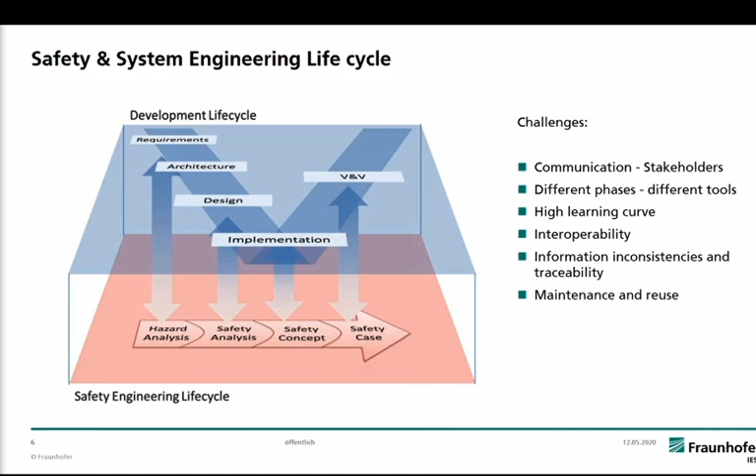able to, right? And another important point is about information inconsistencies and traceability, meaning that even if you are able to move information from one tool to another, you still have the problem that once you want to maintain that information, whenever you update it in one tool, you basically have to do the same in the other tools, and this requires a certain process to make sure that the information is not lost and that the updates are done correctly, and so on. So this makes things a little bit hard in our current daily life, right?

And this is basically what we see happening in traditional safety engineering. Typically you will see that for the HARA we will use Excel, for example; for the safety concept, the safety case, or for item definitions, you will basically use Word, because this typically includes a lot of explanations, maybe figures and so on. For requirements engineering you have more specialized tools. And whenever you go for validation, verification, simulation, and design, you will have even more specific tools to work with, right?

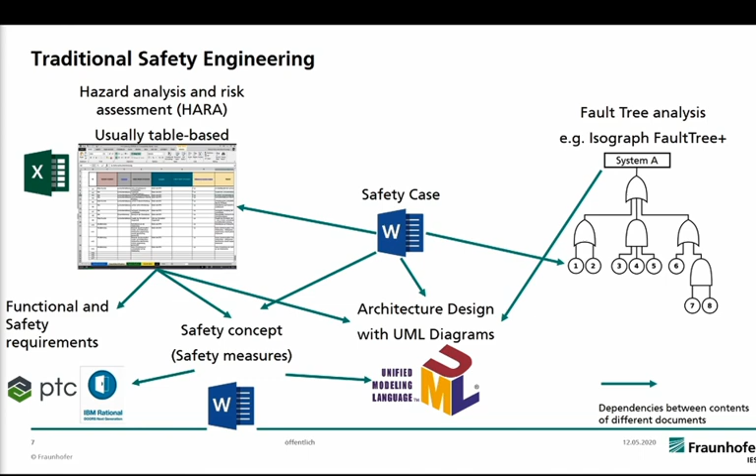So the point is, what can we do about it? Well, our answer to that is to move towards integrated model-based safety engineering. This means that we want to formalize to a certain extent those documents that we usually make use of in these other tools. The idea is to integrate those in a domain ontology. This is the picture that you see on top right. These are all the concepts that bring many of these artifacts together, they are integrated, and then they will be able to be displayed through views. So this is basically what we want to achieve here.

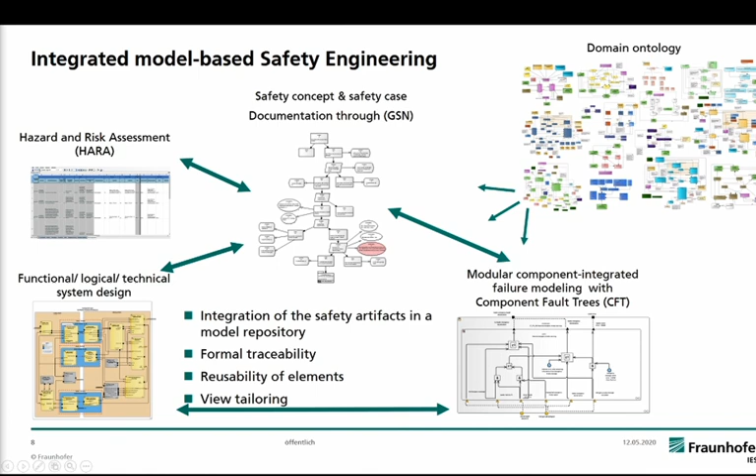We want to make sure that all these artifacts and all this information documented in those different tools relate to the same model, and this model contains these artifacts connected to each other, so that we have a gain from that. The most important thing about it is the traceability aspect. Once you have those artifacts connected and you're able to trace them, you can gain a lot from it with respect to analysis, traceability, and checks like consistency or completeness, general validation checks with respect to your models. So this is one of the important aspects you should aim at when having such an integrated model. So how can we support that?

Well, we want to present to you today safeTbox, a tool that implements such an approach. What is safeTbox? safeTbox is an Enterprise Architect add-in. This means that you can extend and specialize the UML by doing profiling, which basically allows you to define your domain-specific model. Moreover, it gives you the possibility to extend the functionality by executing your own C# code. safeTbox is a little bit more than that, but this is the core extension possibilities provided by Enterprise Architect.

And what else is safeTbox? We not only wanted to have an integrated solution, but we're also looking at other aspects of a model-based solution that are very important, which are the usability concepts. We not only want to be able to model, but we want to be efficient doing that modeling, and get fast over our activities, because we want to focus on the things that we do and not waste time modeling some dumb aspects. So basically, safeTbox provides its own set of context menus, controls, shortcuts and so on, and we will see that in action relatively soon. All right.

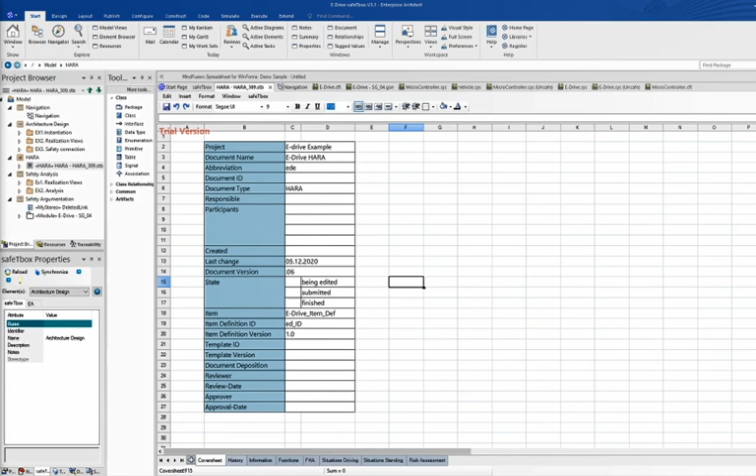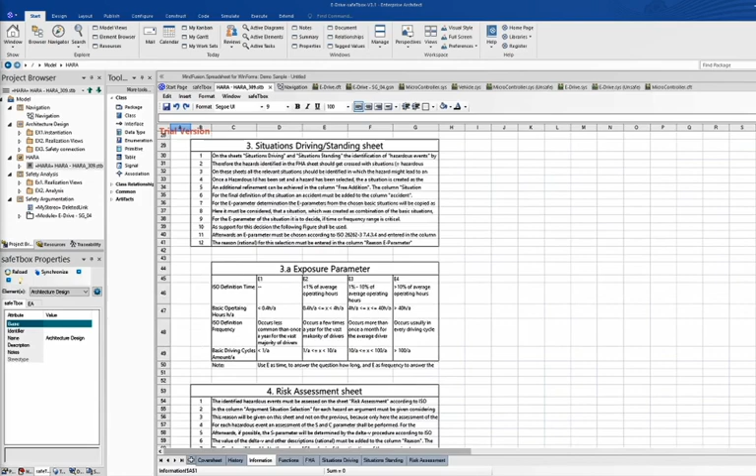All right, so I switch now to my model, and here we have already opened our HARA. You see on the bottom several tabs, and these describe the steps that are meaningful to be performed within the HARA, which allow you to create such an important document. So we have something very basic like your cover sheet, your history, a couple of guidelines on how to perform this HARA. This is flexible, and the user will be able to exchange those descriptions and tailor them to how the company works.

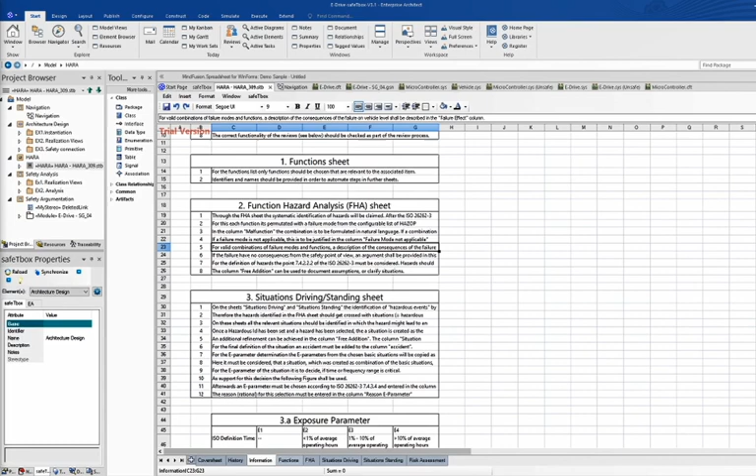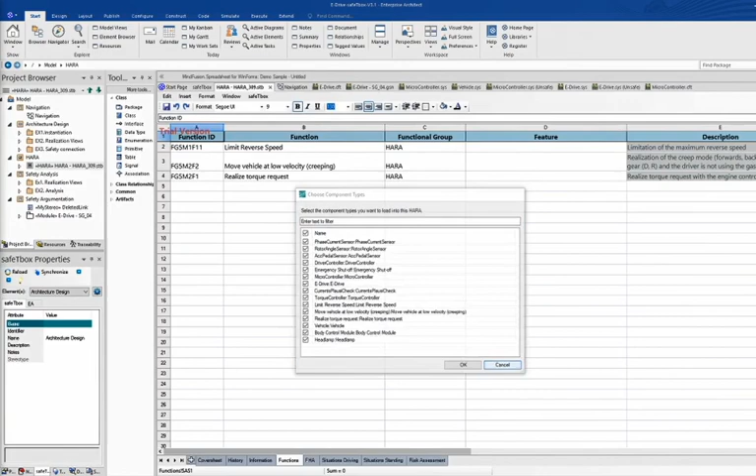But in the end, the rest of the tabs of this HARA sheet are more or less fixed from the functionality point of view. All right, so what can we see here? Our HARA works in the following manner. In this first tab, called functions, you will be able to load existing components or existing functions. Then you will see here a list of components, let's say functions, depending on what abstraction level you use for your HARA, and they will be listed here.

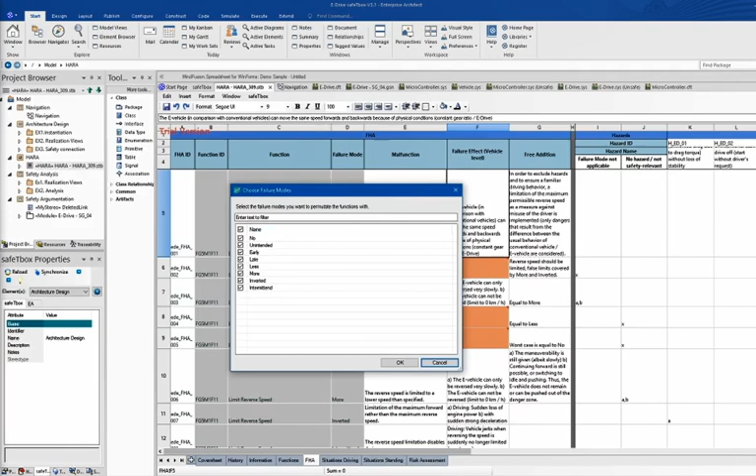Basically, this can be done by permutating. As I pointed out, you can define whether you would like to permutate something or not. On the other hand, you will be able to create that catalog of hazard words. So if you want to add new words or permanently remove the ones listed, you can tailor it to your needs. Once you do this permutation, it occurs automatically. These parts still need to be filled by you with meaningful explanations. This is where the analysis comes from.

And finally, you will be able on the right side to define the hazards. The hazards, as listed here, need to be crossed against one or the other malfunction. So you have the possibility to define whether one of these malfunctions is not really applicable, it cannot be described, or it was described through another failure mode already, whether it is safety relevant or not, and if it's safety relevant, then it will have a cross with the hazard that you may have defined.

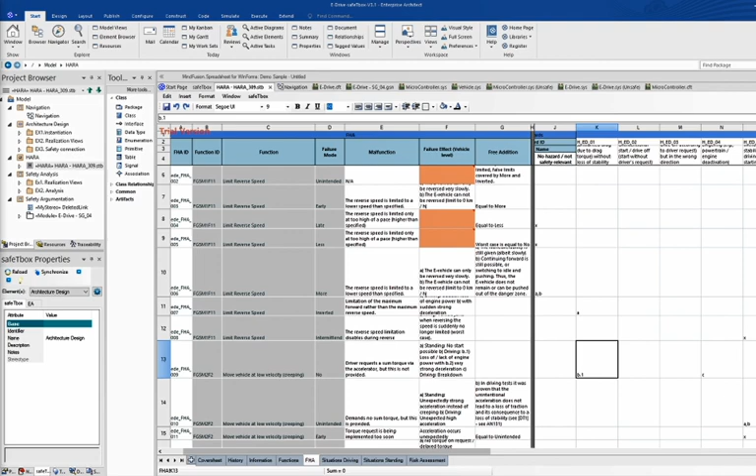This creates, as you see, a traceability already between hazards and functions, right? Good. Once you have done this, then you will be able to perform or create and define the hazardous events. What are the hazardous events?

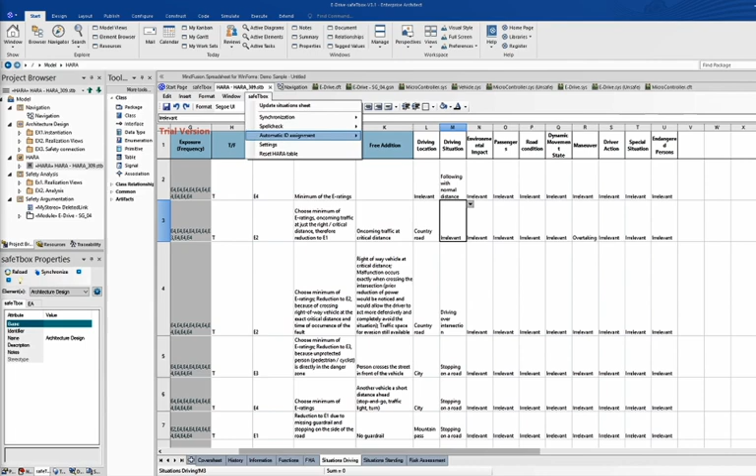Well, basically what you want to do is take a look at your catalog of driving situations and standing situations, which is what you see here on top. And then basically you can select one of those different scenarios by taking some of them from the different categories. Of course, as I pointed out, you can again configure such a catalog. You can define the categories, you can define the items in this category, and then you can determine what is the exposure parameter of these situations, right? Good.

And by combining those situations, then basically you fill automatically the situation description. Of course, sometimes you may also want to provide some extra descriptions, and then you can do it in this field here. And in the end, you might also describe the accident that may happen from this concrete situation, and therefore, in the end, provide a refinement of your parameter, whether it will stick to the ones automatically associated with the situations, or maybe another. Maybe you want to lower it because you have an argument for that.

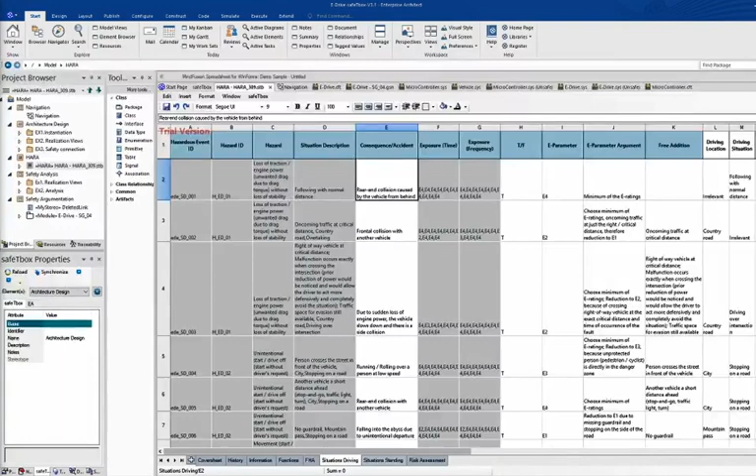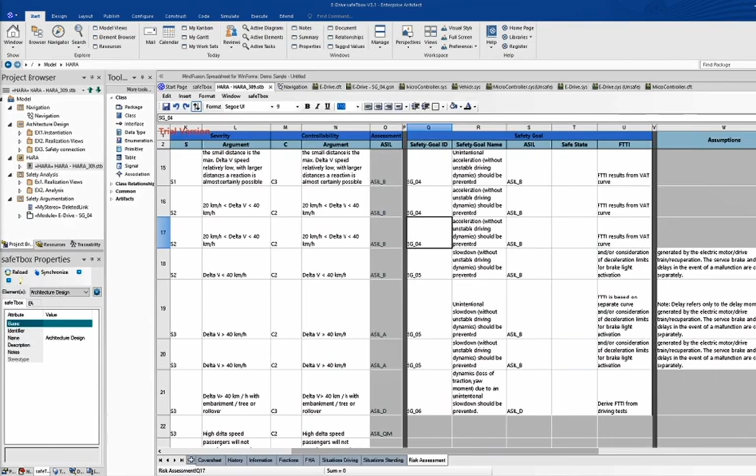So standing situations work similarly, and finally for the risk assessment, basically you have a lot of information which is already loaded from the hazardous events, and what you basically have to do here is to fill the part of the severity and the controllability. And if you want, you can provide, of course, an argument for where this value is coming from, and finally, of course, decide what safety goals need to be associated with this assessment of the hazardous events.

Finally, of course, you can also link here assumptions to your safety goals, or let's say to your entry of the risk assessment table, and complete the risk assessment in total.

So one of the important things about this approach, as we have presented here, is that we have, first of all, a tabularized approach. This might be confusing for some people, because some people think, okay, if it's model-based, it needs to be somehow in a diagram, but this is not necessarily true. So what we have here is simply a tabularized approach, in which some of these elements are actually modeling elements.

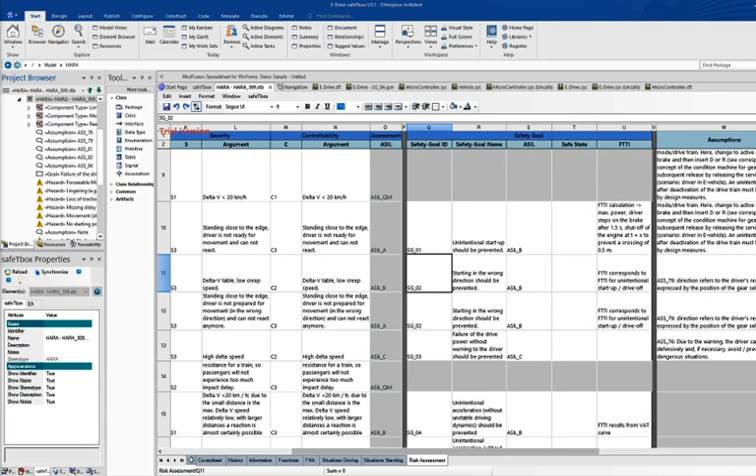So whenever we look back in the details of our project browser in Enterprise Architect, we will be able to see that we have here the functions that we used at the beginning, several assumptions, then safety goals, and then hazards. So these are basically the modeling elements that we consider most important to be consumed outside of this table.

And of course, the advantage of having this HARA in a tabularized way and not in a diagram is the compact way it is displayed here. So basically, we don't need to waste huge diagrams trying to depict this, because all this information is simply very compacted here, and then we just focus on only the artifacts that are really relevant for the rest of our safety life cycle.

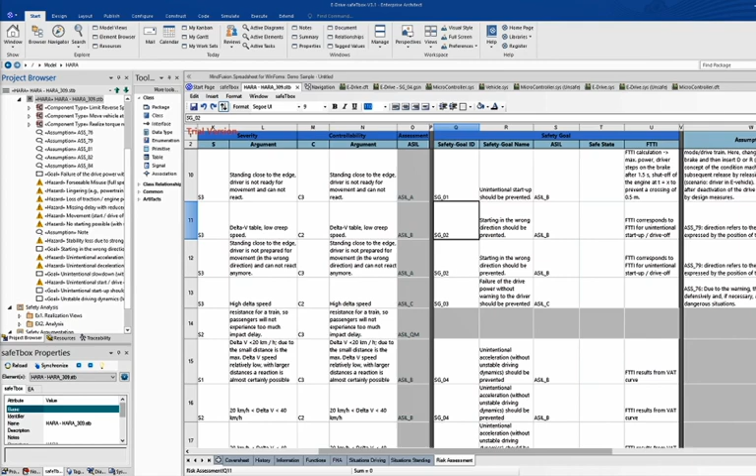And so we will see later how, for example, those safety goals are related to our safety concept, or how hazards can be linked to the fault tree analysis, for instance, right? So yeah, I think this gives you an overview of the HARA, and I would like to then move forward with the rest of the presentation.

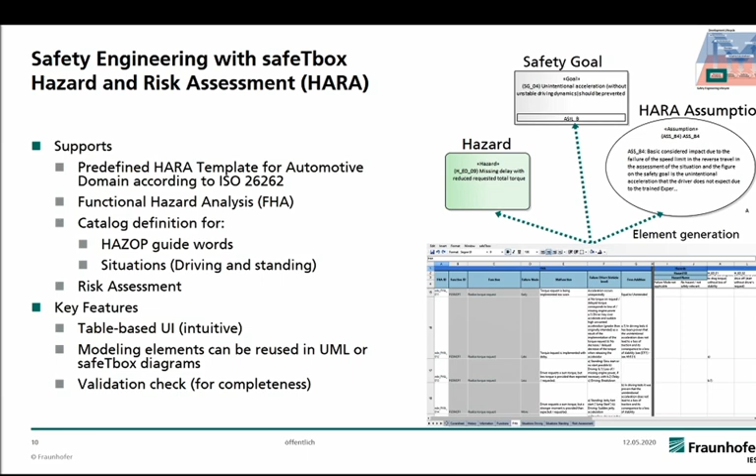Good. So coming back to our slides, basically, we can move forward with our architecture design part. And what we mean here with architecture is, there are many things that you can do in architecture, but we want to focus especially on the use of functional networks.

So well, this is not really part of the safety life cycle, but functional networks are probably one of the most important artifacts used by engineers to communicate a design, right? And currently UML and SysML provide support for it. So basically, why do we have an extra implementation in safeTbox? That is the question here, right?

So well, first you have a simplified and generic approach here that allows you to depict your desired level of detail. Whether you build a more functional, logical, or technical architecture is your decision, let's say in the way you name things, and in this sense, it's also kind of similar to SysML.

But of course, with the difference that you don't have so much modeling complexity as provided by SysML, which provides many ways of depicting a port, for example, right? Second, it focuses on the interaction with the safety engineers. We'll see that it will be possible to define, for instance, ASIL levels for components or ports, which might represent CAN signals if you want to go for more technical views, or might simply represent a data flow just for data exchange. So it's really up to you how you handle that abstraction level, right?

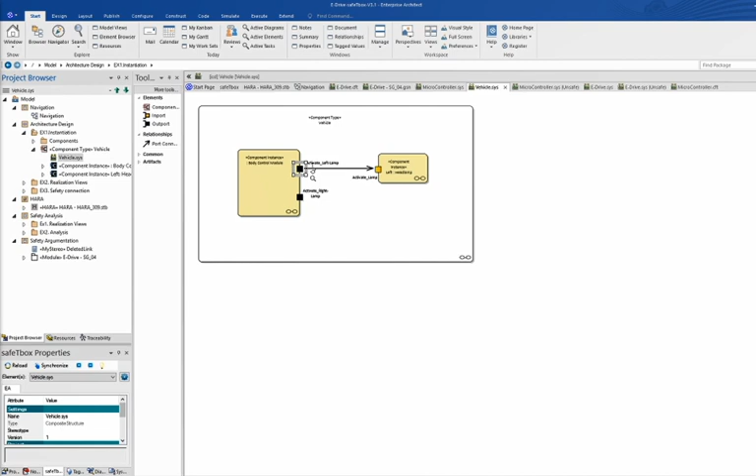All right, so let's take a look at that in the tool. I have prepared for you a couple of very simple examples to follow. In this first example, I want to show you our instantiation concept, right? In this case, we see here a vehicle. We see the body control module in a vehicle controlling the activation of the lamps, for example, the headlamps, right? So how do you model multiple headlamps?

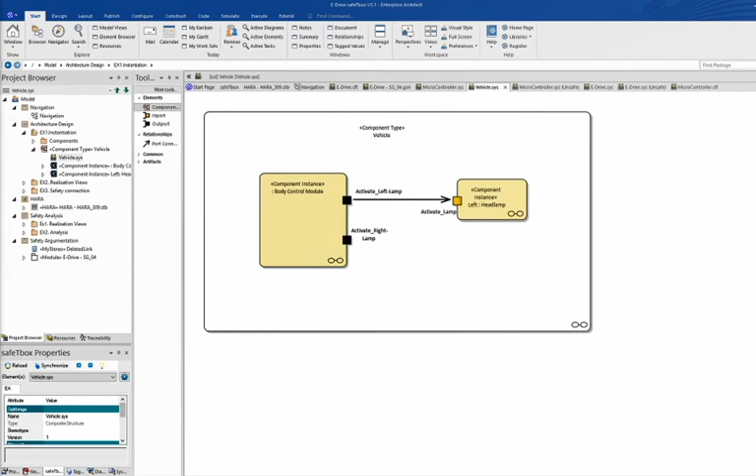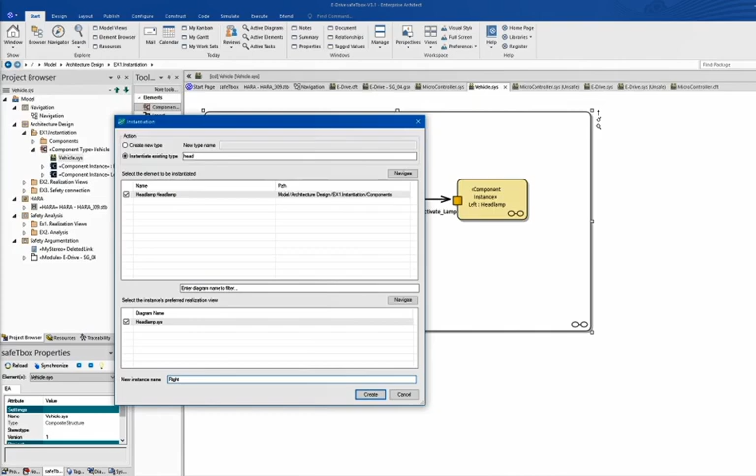Well, we basically support the user in that we have this instantiation mechanism that allows you to find your components easily. For example, you have your headlamp, and you want to say, okay, I want a headlamp. I already have my left headlamp. I would like to add the right one, and this will then automatically bring my right headlamp into my diagram, and finally I will be able to connect those signals.

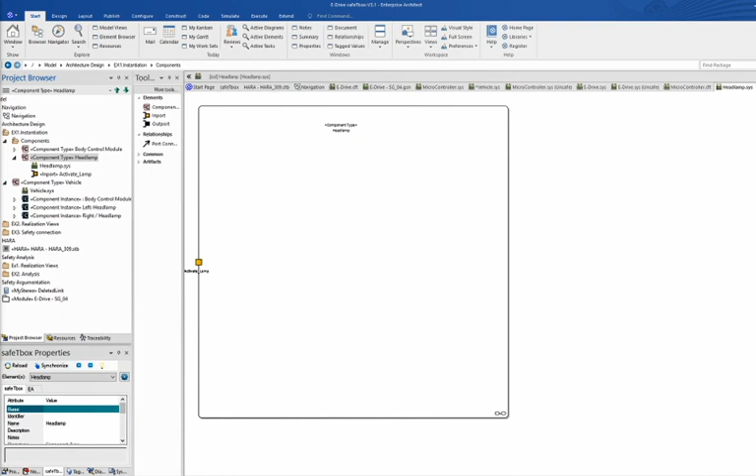So you see right now we have reused a component. Whenever we look behind this and we find the realization of this headlamp component, we'll see that it basically exists only once. As you see here in the project browser, we have only one headlamp, which has been instantiated two times here, on the left and on the right. And this simplifies the way of reusing components in safeTbox compared to what you can do in UML or SysML, where you have to go a little bit more manual during the modeling phase. We simplified this process so that it gets faster.

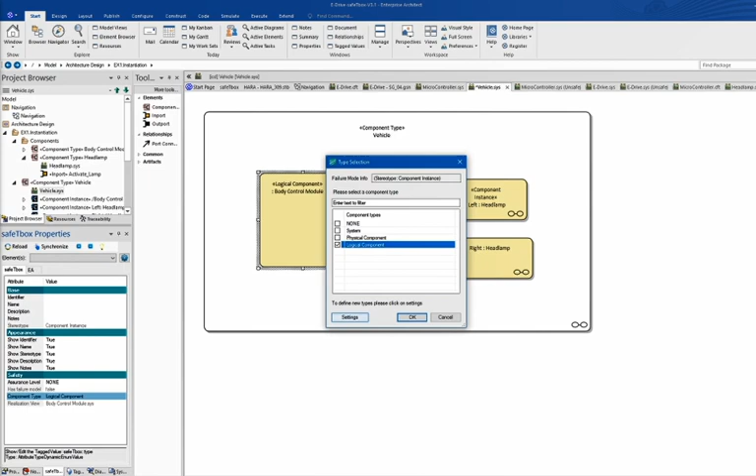As I pointed out, what you could also do here is define the type of your components. You might want to say, okay, this is not a component instance, which is the generic option, but this is actually a logical component, right? You might define, of course, your own types of components. You will be able to do so through the settings. So you can define new types for components, as well as for flow types.

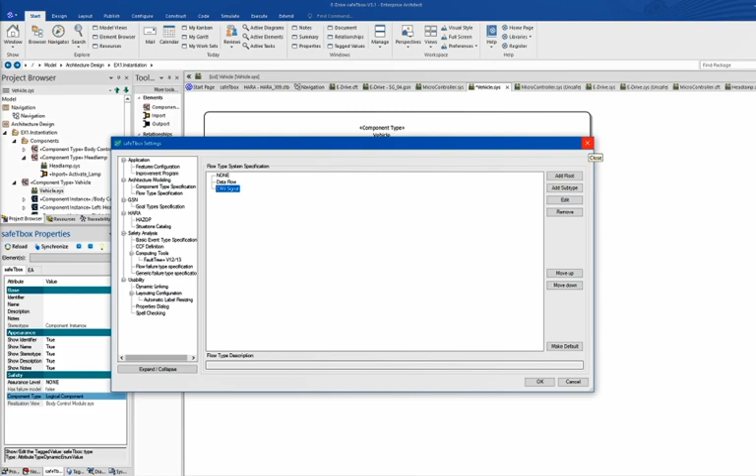Meaning you may decide, for example, for CAN flow, to go a little bit more technical for a CAN signal or whatever, and this you will be using basically for your ports. For instance here, this flow type is none, but you will be able to say, okay, this is a CAN signal, and this is now already set for your port, and this will have a couple of advantages. We will see that later when we integrate this with the component fault trees. And as I pointed out, this will allow you to formalize your models a little bit better.

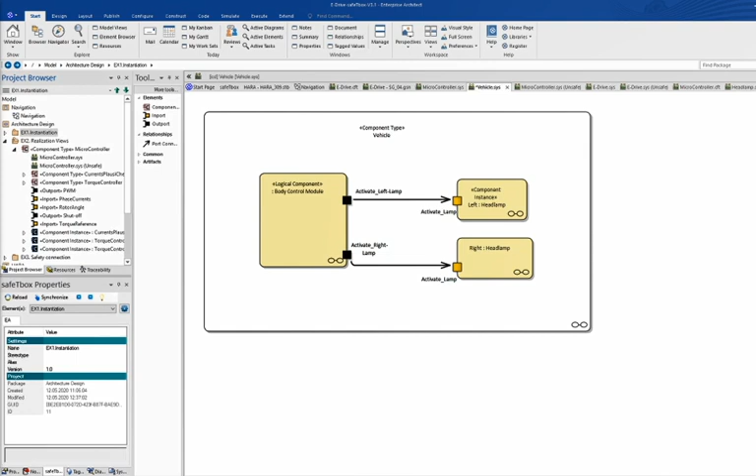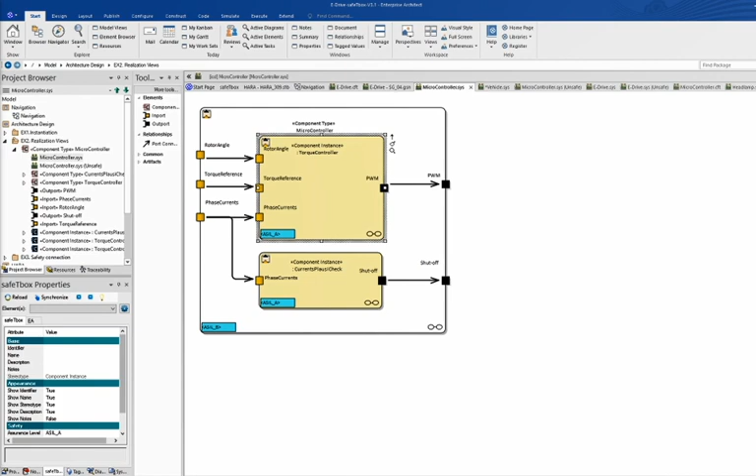So I would like now to explain our second example with respect to realization views, and what is a realization view. So basically we see that here a component is always typically divided into a specification view and a realization view. The specification view hides all the details of the implementation of a component. In this case, this component instance will represent the specification view of the microcontroller component, right? While in the microcontroller, we are seeing the realization view of that component. So we're seeing how this microcontroller is being refined internally and what components make part of it, right?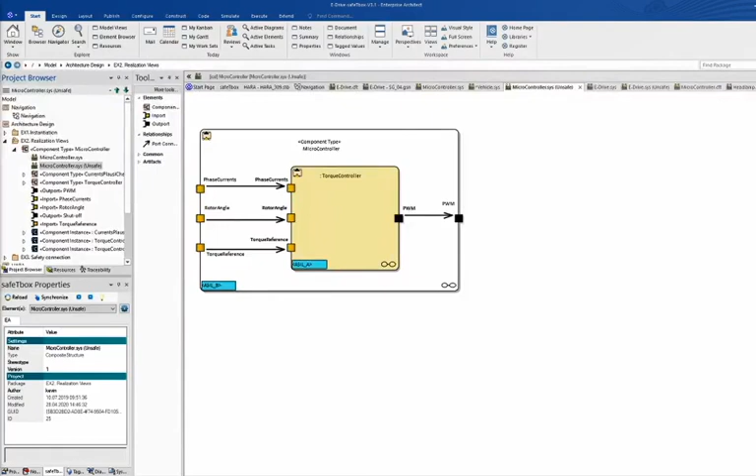And what can you do with that? As pointed out in the slides, you can manage, for example, variants of this microcontroller. You see in our project browser, we only have one microcontroller and we have two diagrams associated to it. One we have called unsafe, which has a simplified version of the microcontroller's realization, while the other one has an extra plausibility check. And this is what we want to achieve. We don't want to create another microcontroller. We just want to say, it will be the same microcontroller, but I will have it in two different variants, two different implementations, right?

Because we have two different versions of my vehicle or of my functions, and therefore the main interfaces of the microcontroller might not change, but internally it might change the functionality that realizes that controller, and this is what the realization views might be useful for. And what can you do with those realization views? Well, we support you and automate many things for you with respect to the creation, the cloning, setting those realization views for those components and so on. This facilitates a lot the navigation and keeping them all up to date, right?

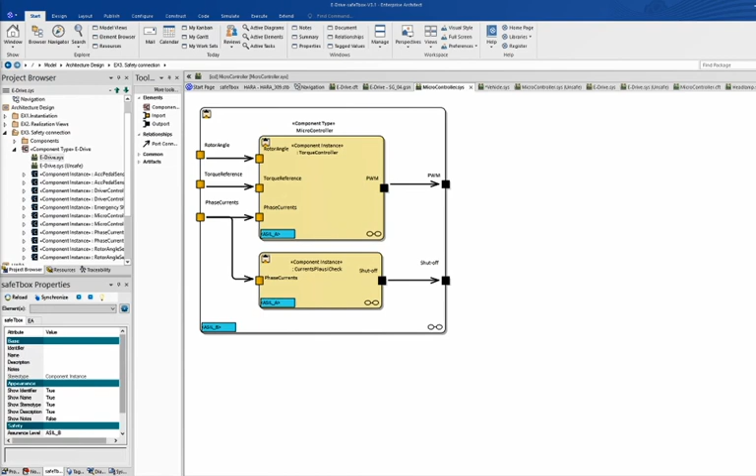So here you will see, for example, at the top level of the eDrive system, where this microcontroller has been instantiated again, a similar story. Here we see the unsafe version with the microcontroller. Of course, behind this microcontroller is a simplified version, right? And on the other hand, a more robust eDrive system, already including an emergency shut off and a safer microcontroller, right? And again, here you will navigate to your specific version of the matching realization of the microcontroller. So I just wanted you to know that this can be applied over all the hierarchy, and this will allow you to depict those variants along the whole hierarchy, right?

What I wanted also to say about this example was the focus that we place on interaction with the safety engineers. As you see here, when the actual functional network would not, in theory, have something specific about safety, we have considered, for example, adding the ASIL levels to the components or the ASIL level to the ports of the signals. As you can see here, I may want to decide what ASIL level that signal is, which might be relevant to facilitate that communication and interaction between the engineers, right?

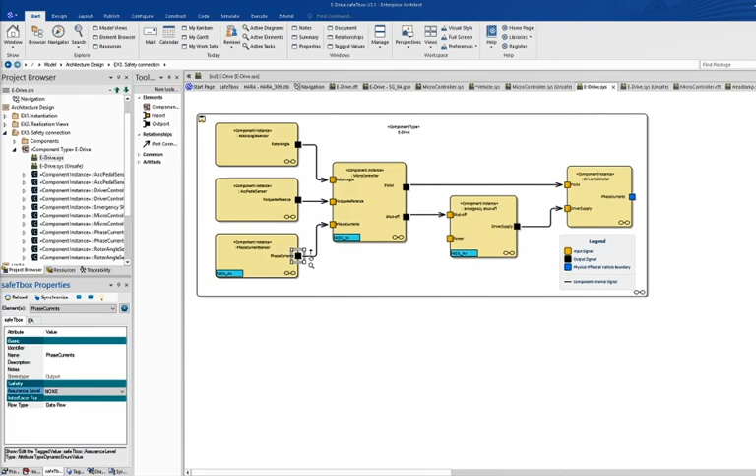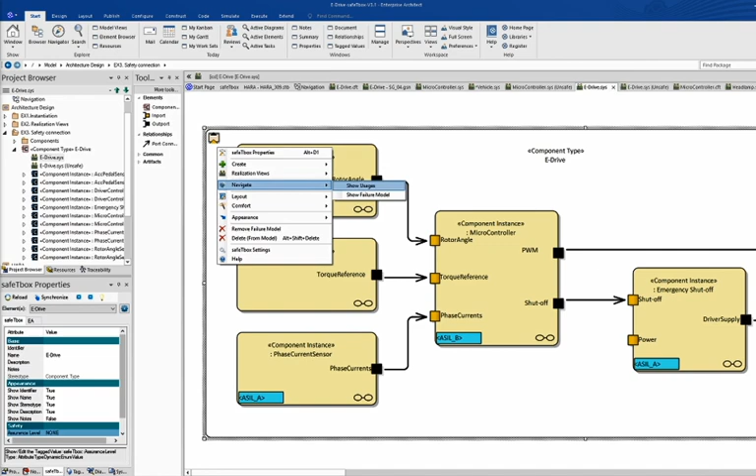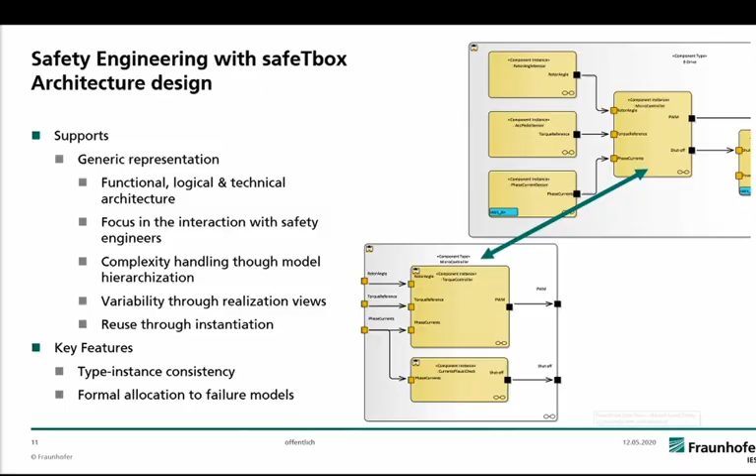And another aspect that is important about this diagram, I hope you will notice, I will zoom up, is this icon here. This icon on top means that this component is associated with a failure model. I would like to bring you there now. And this failure model is basically a component fault tree, right? And this is what I would like to talk about now. So I'll be back now into my slides. And basically this is what we have with what we just saw.

Basically, you can create the hierarchy, you can link ports with ports, and this can be understood as the propagation of failures within a fault tree of one component to the fault tree of another component, and in this way create the failure logic structure for the whole system, also following the same modularization concept as provided by the architecture, right? So this is what you can achieve here, from the modeling perspective. Again, we will have the same chances for reuse and variability handling as showed before.

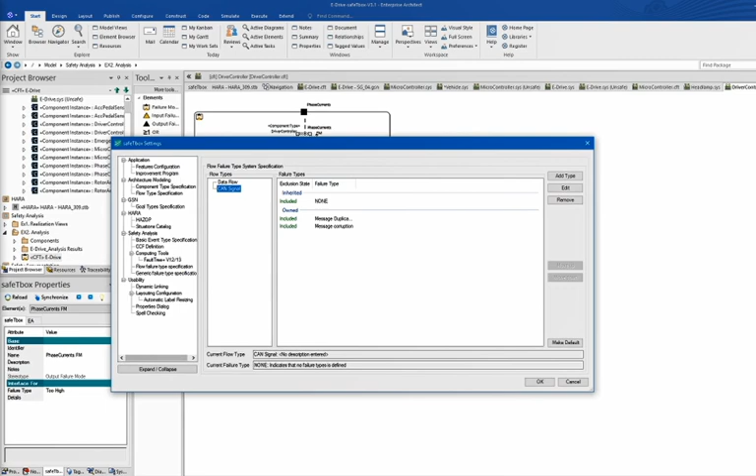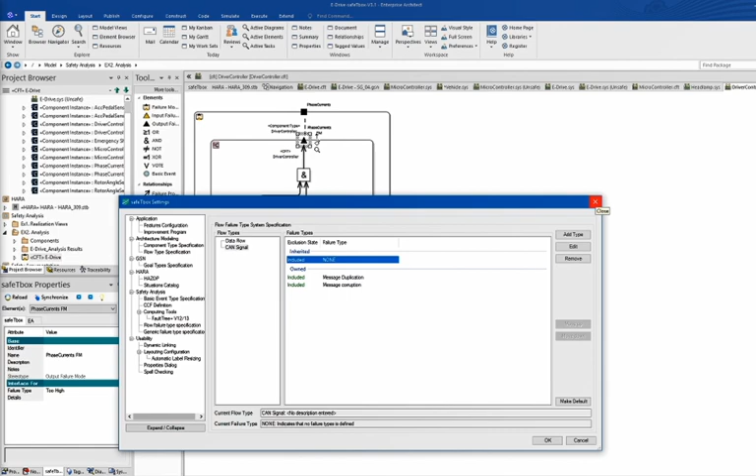Another aspect is that you can define specific failure mode types for your signals. For example, this failure mode is associated to a port, and this port has a special flow type. You can then define for those flow types the kind of failure modes they can have, which means you are formalizing your model. This helps you, depending on how structured you are, move faster with your analysis and in a more systematic way.

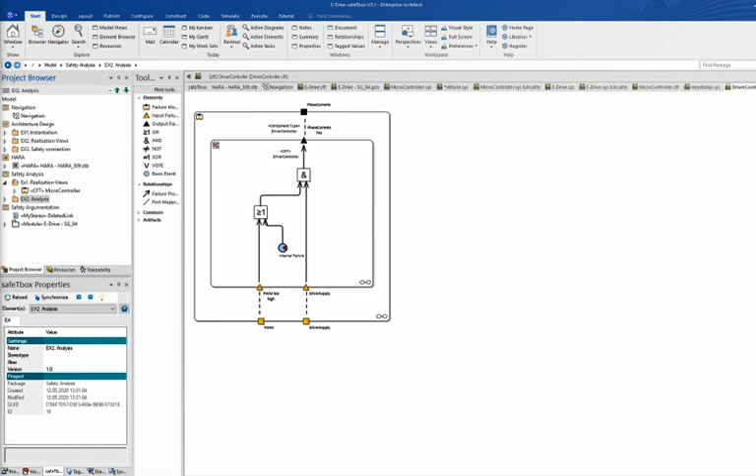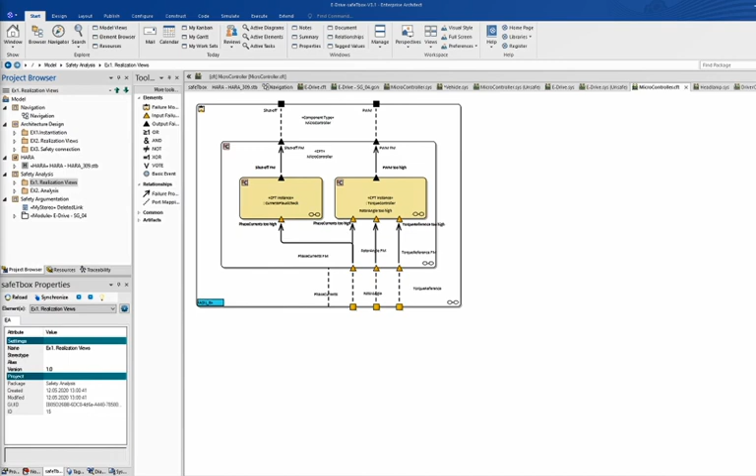So this is with respect to the modeling aspects. Going back to our slides, I want to finish this part saying that we also support to a certain extent SysML, in the sense that we are able to integrate fault trees and SysML blocks in a similar way as we do for components. Those mappings can be established, the traces can be followed, and so on. It doesn't have that power of the type mechanisms, because this is very safeTbox specific and would be hard to support with SysML, but since the tool is extensible, you can implement it yourself, or we can implement it for you if desired.

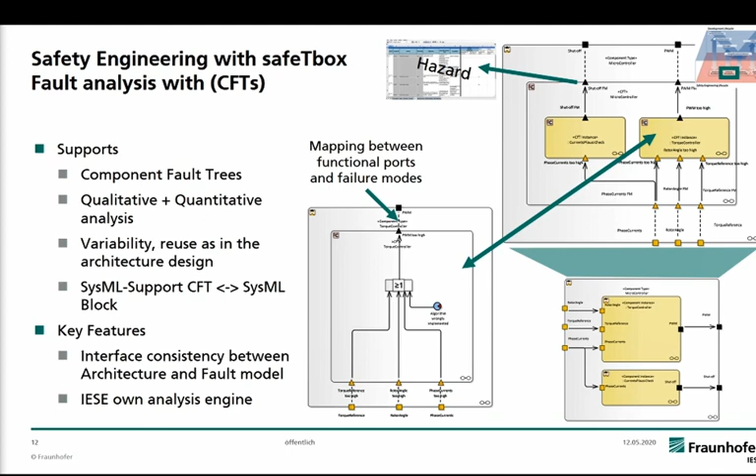As I pointed out, we have a strong focus on safety analysis, specifically fault tree analysis. Our tool not only supports the modeling aspects but also the qualitative and quantitative analysis. On the qualitative side, we support minimal cut set analysis, and on the quantitative side we support top event probability, event importance, and common cause failure analysis.

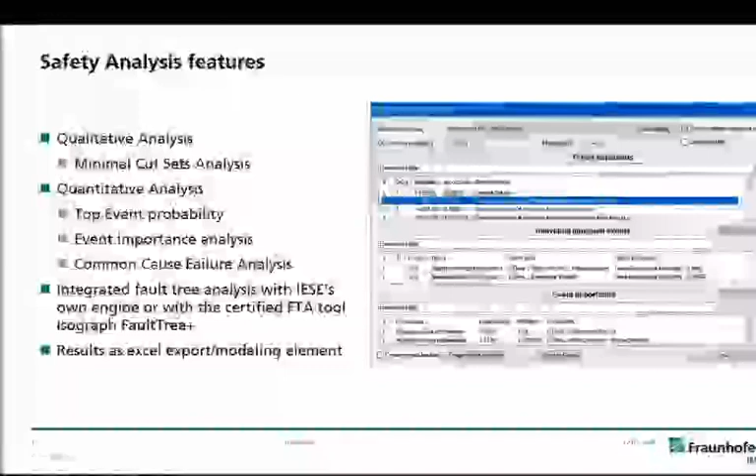You will be able to decide whether you would like the tool to perform the analysis on the IESE computation backend, or do this with Isograph Fault Tree Plus. There is a possibility to connect the tools. So how does this actually work? When we look back, for example, at one of the fault trees, a basic event can be parameterized here.

For example, you can choose between a fixed probability, rate, dormant, time at risk, or uniform. We have not yet supported in our computation backend all the distributions that Fault Tree Plus supports, but we have chosen the most common ones. You will be able to parameterize basic events and parameterize input failure modes.

Why is this the case? Basically, what you can do is assume to a certain extent what the failure probability coming from another component will be. If you depend on the input of other components, you might assume during your development what this information will be if you don't receive the fault tree and cannot integrate it into your own. Then at least you might receive this information and model it internally, and therefore perform the analysis modularly at any level.

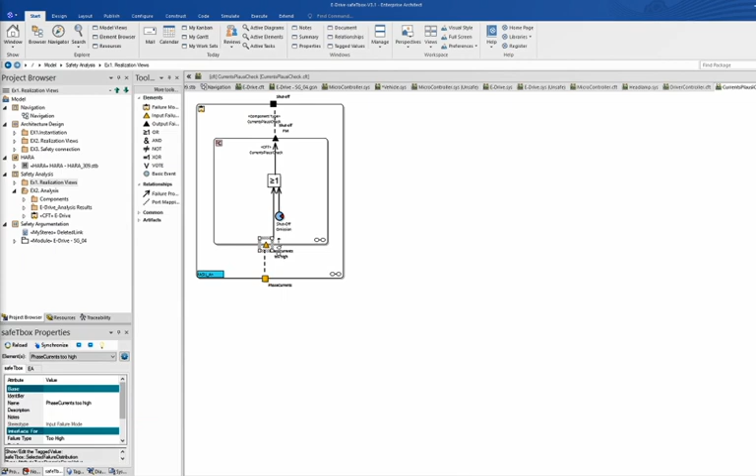You can do this on the bottom level, or also on the very topmost level, your top events, but you can also perform it on any intermediate step. This will consider everything from that point to the bottom of the tree and calculate the metrics for you.

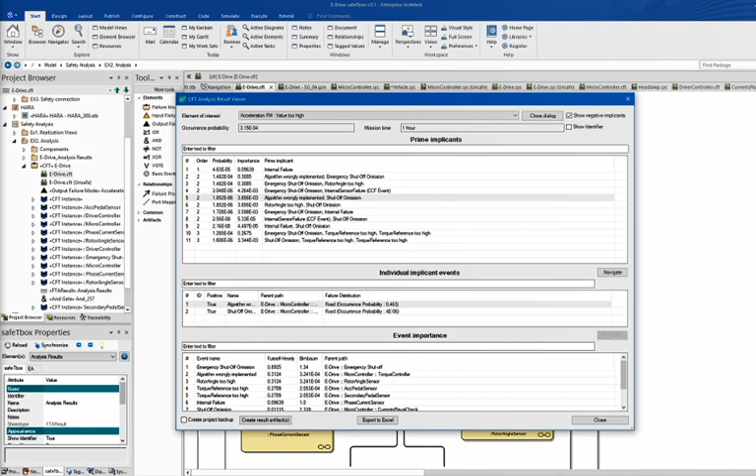We may have already seen a short glimpse of how that looks like. Here you see, for example, those probabilities and cuts. You have the details here, and you will be able to navigate through to those basic events or input events. In the end, you will be able to export those results to Excel, or create a results artifact, which means a modeling element has been created and can be used as evidence within your safety case or safety concept.

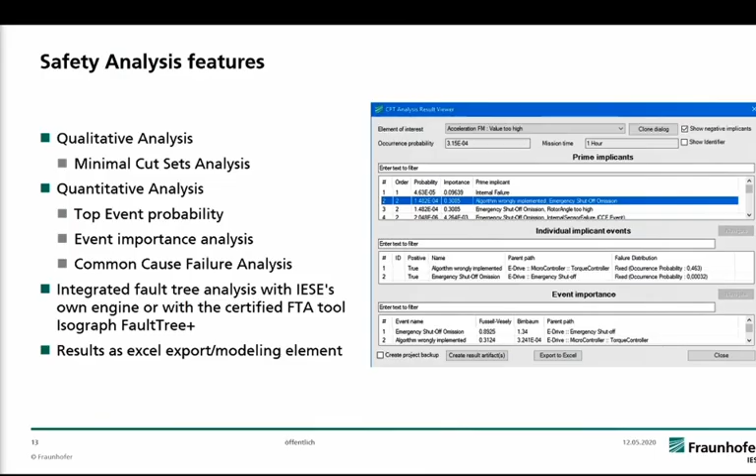Which is where we're going next. Within the safety box, we have implemented the Goal Structuring Notation, and we use this basically for two purposes. You can create your safety concepts, and you can create your safety cases with that.

What is GSN? GSN is basically a modeling technique to organize and structure arguments. This is what you do with your safety concept, because you want to structure how your system is actually safe, and you want to explain this in a few sentences.

This technique allows you to organize the more important things coming from a safety goal, which might reference a hazard and a HARA, and then bring those down, splitting that safety goal into functional requirements, going down into technical requirements.

You might go further to the allocation of components if you talk about the safety concept. And if you go to the level of solutions, meaning you use solutions to provide the evidence that something has been fully completed, this is basically a modeling artifact used most commonly in the safety case, which most probably links to high-level artifacts.

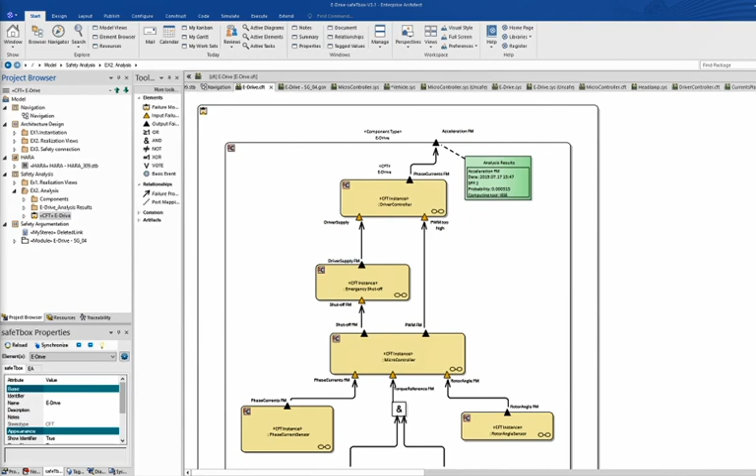Let's take a look at our safety documentation. As I just pointed out, this safety goal - we have created here a demo example showing one of the safety goals that we have found, or identified, through our hazard analysis.

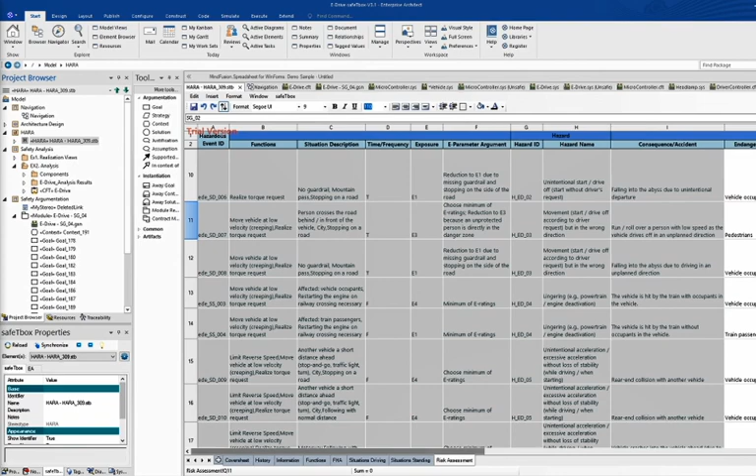We'll see, for example, here that in our risk assessment, the safety goal exists, right? And whenever I say navigate to safety goal, it will bring me directly here, where I basically have it split down into functional requirements, for example.

Moreover, you have the possibility here - it's a nice thing about not only the GSN but any other artifacts within safeTbox - that you are able to link easily to other artifacts within the model. You see here that this safety goal exists in the context of the E-Drive, which you can navigate to, and this exists in many different kinds of diagrams you can navigate to.

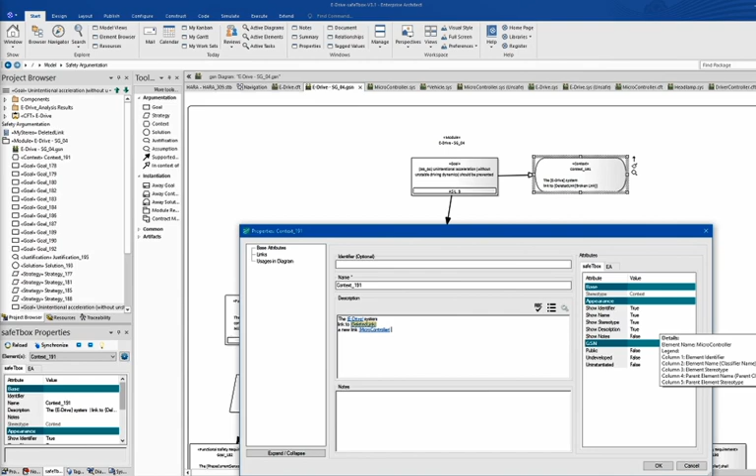Moreover, you'll be able to create a new link, for example, to the microcontroller that we've seen in the past, like the component or the CFT, and explain how things belong together. You'll see the traces being created in the back for you in a very easy way.

It will also tell you, for example, here marked in yellow, whether the links are in good shape or not. In this case, it's kind of a warning - this yellow color means that this link has been broken. You can recognize this in the model.

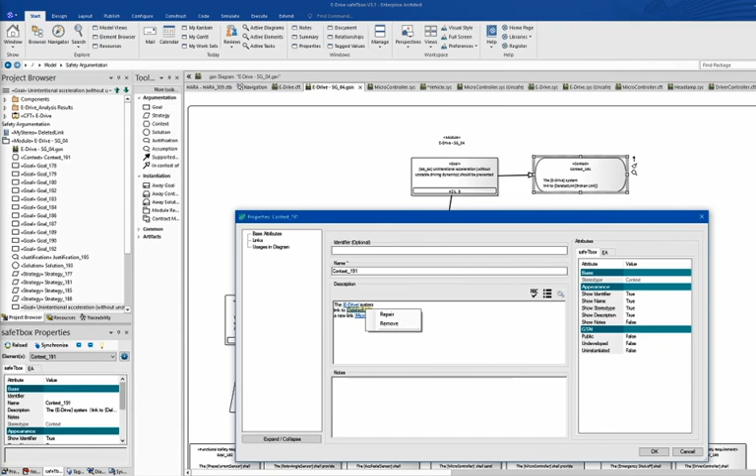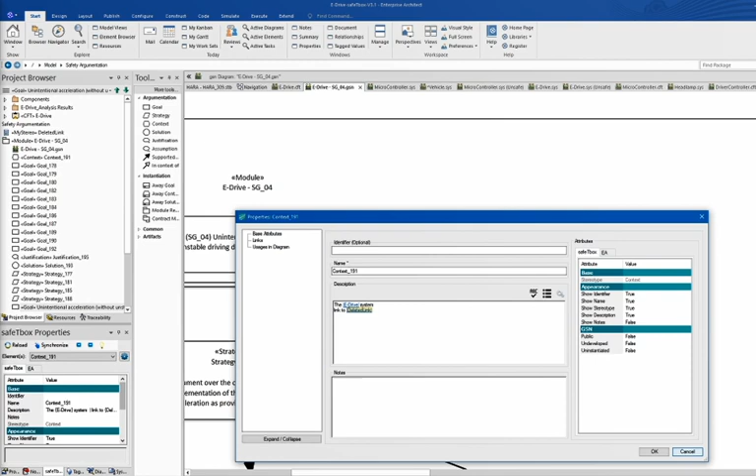Let's see that a little closer. So it's a broken link, and this means you have two kinds of broken links - the ones that are repairable, which is this case, or the unrepairable ones. The repairable ones are when the link is actually missing; when the object is missing, it won't be repairable anymore because you cannot reconstruct those elements. But this will at least warn you that you're missing something here, and we can guide you through that process.

Another aspect that is interesting, also from the IESE point of view, is the possibility to reuse other artifacts, or reuse already existing functional requirements for other kinds of arguments, or to modularize your concept.

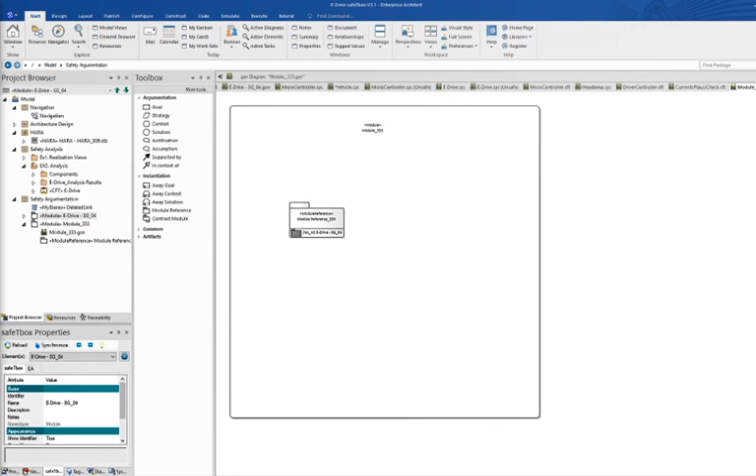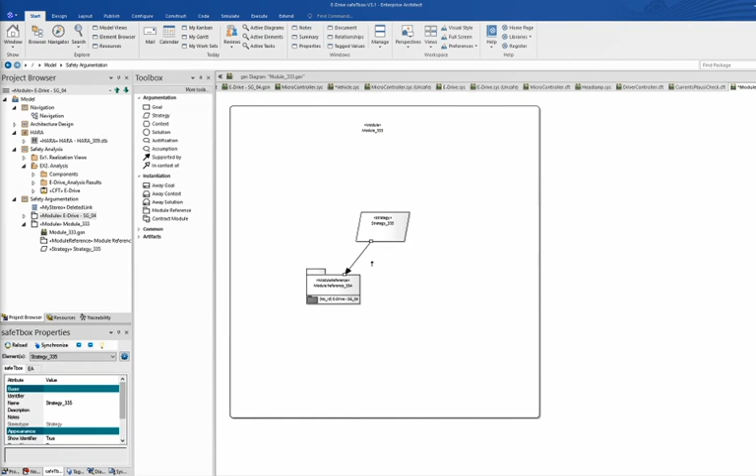So for instance, you may want to create another argumentation module, and within that module create a module reference, which you make a reference to from a strategy, and that becomes part of your concept. So something like this, and basically this explains further how things belong together.

This allows you, similarly to other techniques, to work in a modularized way. This is one important aspect whenever you want to reuse things, modularize, and keep your system in components, avoiding the complexity of mixing everything.

This is one of the big advantages of a model-based approach. You have all the elements in the back, and then many views that show these elements in a slightly different way, or connected in a different manner, focusing the information for one specific stakeholder.

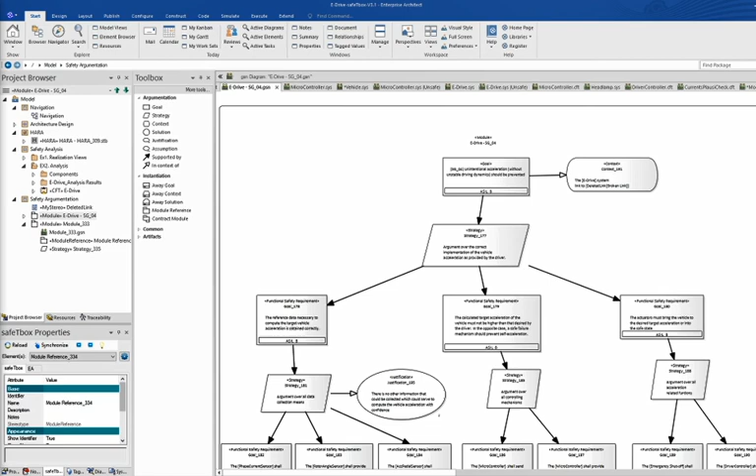What we've seen here most of the time is the focus of the safety engineer, which is our target. But this information is presented in such a readable way that even people outside the safety domain would be able to follow and read it. So we see an advantage in this regard.

As you may have noticed, we do not yet cover the entire safety life cycle, but we want to mention what we are working on.

We're still working on requirements documentation. There's potential for achieving traces between the requirements and the safety concept, and documenting this in a more proper way than just using an extra tool for that.

FMEA is a very common analysis technique that many companies use. We have always preferred fault tree analysis because its modeling power is much higher, but FMEA has certain advantages for fault identification, which is why we're working on implementing it into our modeling concept. This will happen in coming releases.

Integration of security aspects is also something going on, so we are researching in this area. Security for safety has become quite important in recent years because of the openness of systems and the need for integration, so we see high potential here and we're working on that too.